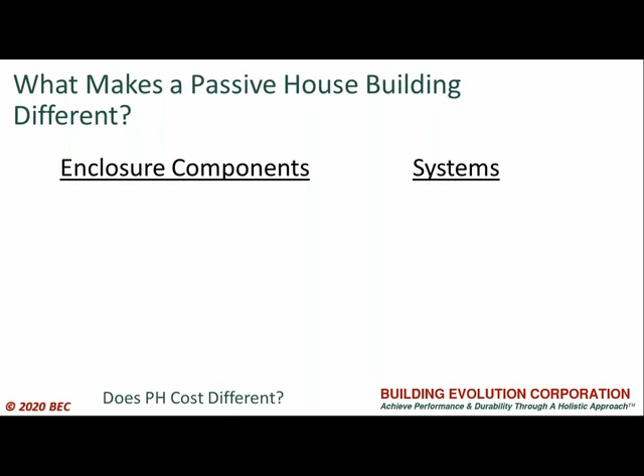You can't answer that without answering the question, how is Passive House different? Different from what? And how long is a piece of string? So it depends a lot on what we are normally building. And we can tell you what's different. So what we'd like to do is go through and talk about what are the big things that are different in a Passive House.

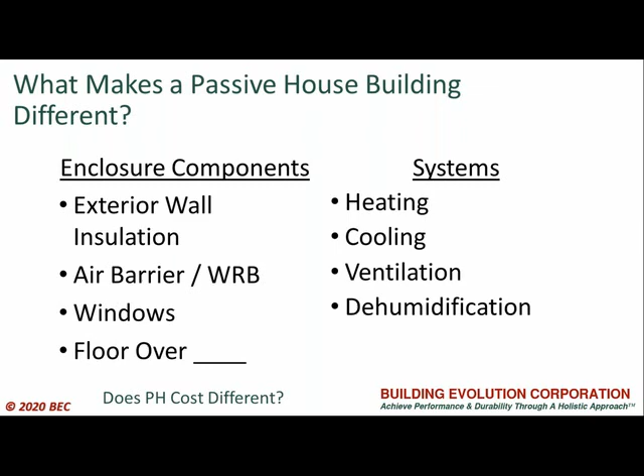I've written them down over there: the exterior wall and the insulation in the exterior wall. That's real different. Air barrier is different. Windows, floor over, whether it's over a garage or an overhang over ambient, that's going to be done different. On the system side, your heating's probably a little different. Your cooling, ventilation, dehumidification. Am I missing anything? Y'all are doing dehumidification, right? Your projects? Okay, good.

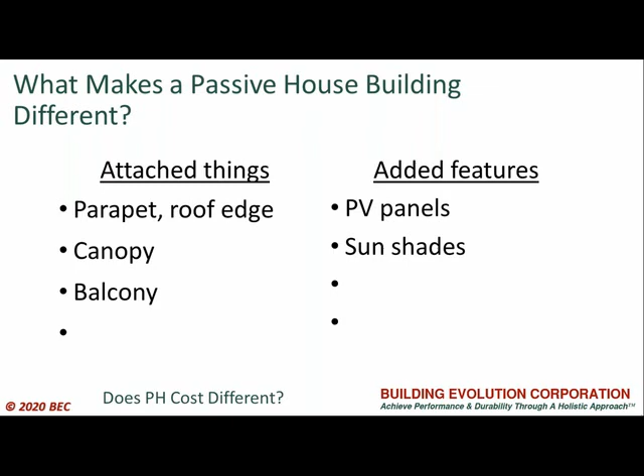All right. Things we attach to buildings, like a parapet, canopy, balconies, added features, PV panels, sunshades. We've got some stories about those if we get time. And then, of course, the design process. Things are going to be a little different. And in the construction process, things are going to be different. So let's go through an example.

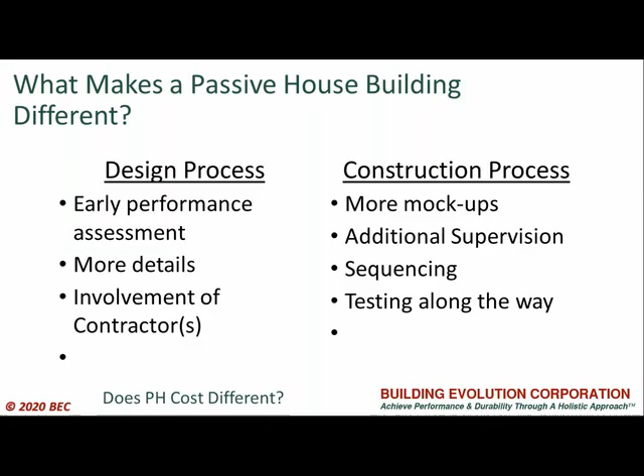We have the exterior wall. So what we normally do, right? We're going to put some kind of vapor retarder on the inside, maybe a smart one, maybe a dumb one. Cavity insulation, sheathing. Sometimes it's taped, sometimes it's not. An air and water barrier on the outside. It may be here, it may be a loose sheet. Exterior insulation, typically between Z-girts. By the way, that's not continuous insulation, but it's exterior. We'll give you that. And cladding.

So, what's different in a passive house? We're going to take an exterior wall. I know there's different ways of doing it. Some people are doing a double wall construction, but if we're putting the insulation to the outside of the sheathing, we no longer need anything more than latex paint on gypsum for a vapor retarder on the inside. So we get rid of that component.

We have cavity insulation, we have sheathing with integral, two different ways of doing it. There's the ZIP wall approach, where we put up the sheathing, it's got the stuff on it already, you tape it. There's the fully adhered air and water barrier, real continuous insulation, so it has to actually be continuous, and cladding.

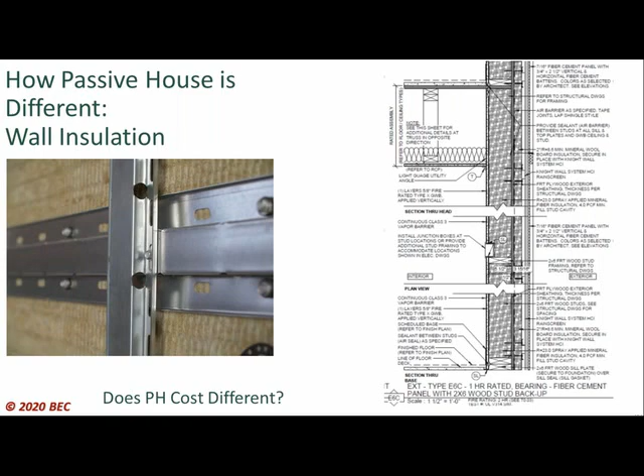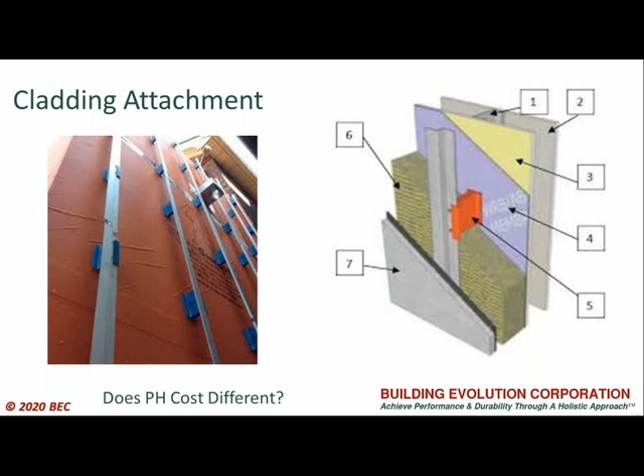So, just an example, over here on the right, we have a typical wall section where we might see some Z-girts going through there, vapor retarder to the inside, and an alternative system giving us continuous insulation, a slight variation on the theme. Here's another system for continuous insulation, and this is shown over an air and water barrier. The picture of it.

Okay, so here's the part of the program where we're going to introduce you to this game of more or less. We've talked about this wall assembly. We'll give you a chance to review it. We're going to ask you, the audience, to tell us whether the passive house building is going to cost more or less than what we normally do. I'm going to need a tally man. Is that you, Wes? I think it's me. Great, Wes is going to take a tally.

And then we are going to submit your answers to Judge Ed from Delbrook, who's going to tell you if you're right or not. And if you get enough answers right, we'll come up with a prize later. Trust me, it'll be worth it.

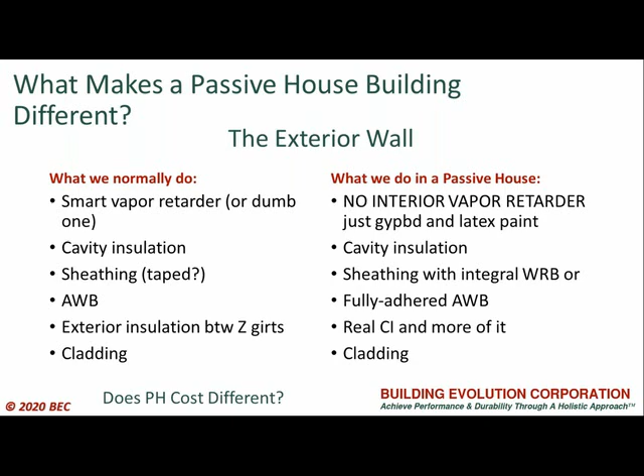Fantastic. All right, so again, here in this example is what we normally do and the passive house wall. So is the exterior wall more or less? How many folks are going to tell us that the passive house wall assembly is going to cost more than what we normally do?

You could say the same, or, the correct answer is always it depends. So we're going to disqualify that answer altogether because that's just too easy. And if you say it depends, you're going to explain to us why it might be more, why it might be less.

So just to Julie's point, we were fortunate enough to win the RFP back in the day and get introduced to pre-construction services. And for us, it was back in the days when LEED was brand new and everybody got super excited.

I'm going to speak today about process, because every job is a little bit different, and your baseline budget could be a little bit different on every job. So talking about what you're going to pull, you know, the 2% difference and the high numbers coming back down to low numbers.

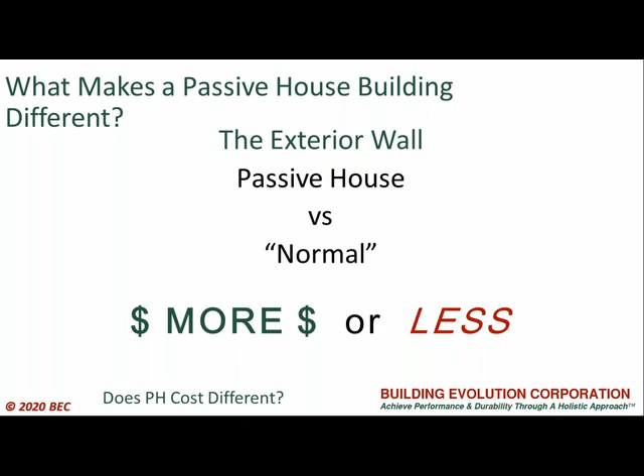Okay, so you guys are good. Off to a good start. All right, moving forward.

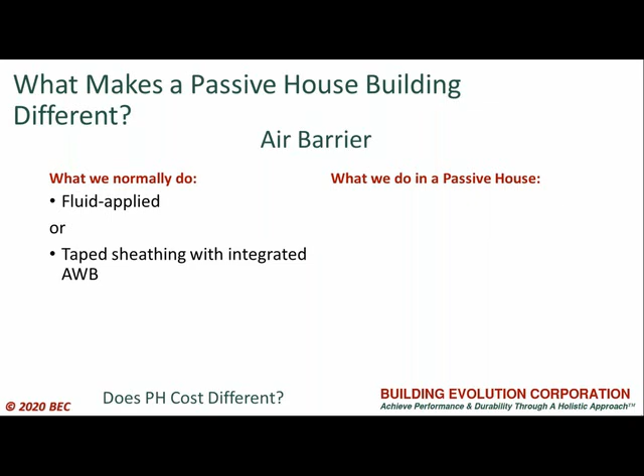Air barriers — something very different about Passive House is the air barrier. So what do we normally do? It seems to be, when we look around, a lot of fluid applied. In the stick frame world, where it's not non-combustible, we see taped sheathing with the integral air and water barrier.

And so in a Passive House, it's kind of the same materials, but we probably see a little bit more of this kind of stuff — you probably hear sheet membrane. Is Oliver here tonight? But we may see some unfamiliar imported products, and the cost of the actual material and the whole system changes.

The whole time — are we still doing this? Really? Okay, all right, it's okay. All right, so maybe there are some things that are different.

Certainly the level of application is hugely different, right? That's the air tightness there — 0.06 CFM at 50 pascals per square foot of enclosure. There will be a test later. You can compare it to the compartmentalization standard of 0.3, so that's a factor of 5, if I get the math right. I'm referring to that number as the PHIUS 2018 standard.

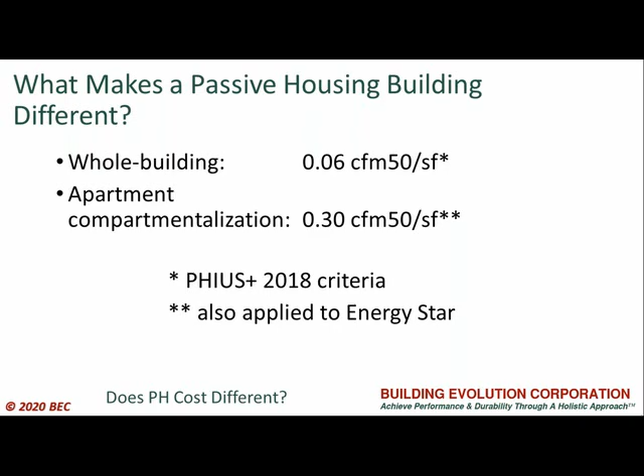And of course the compartmentalization is Energy Star as well, so it's like code, only tighter — a lot tighter. I don't know if folks are using this portion of the code, and maybe the numbers have changed from 2015, but it's kind of been in there — a performance path for air tightness in the code. That's what's in the code, about 0.3. So again, Passive House is about a factor of 5 tighter.

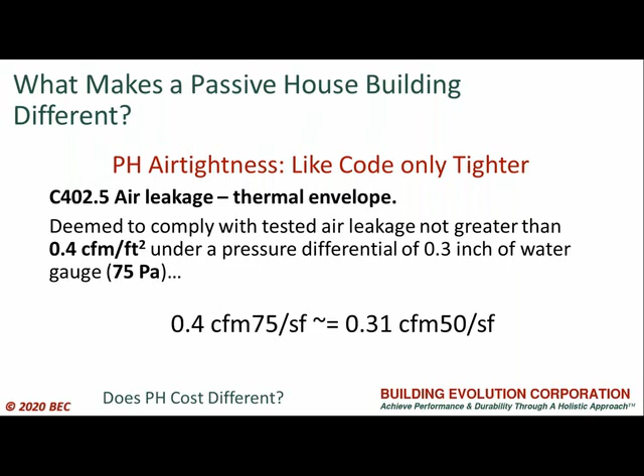Another thing we run into with Passive House is sometimes the air barrier is on the inside — it's not just around the outside of the building. You may have a space inside the building that really should be separated from the rest of the program, like a compactor room would be a good example. So we need to bring an air barrier to the inside of the building and figure out places where we're going to need to turn the air barrier in. Things get out of sequence, because you're doing your exterior application there and then coming back to frame in that wall.

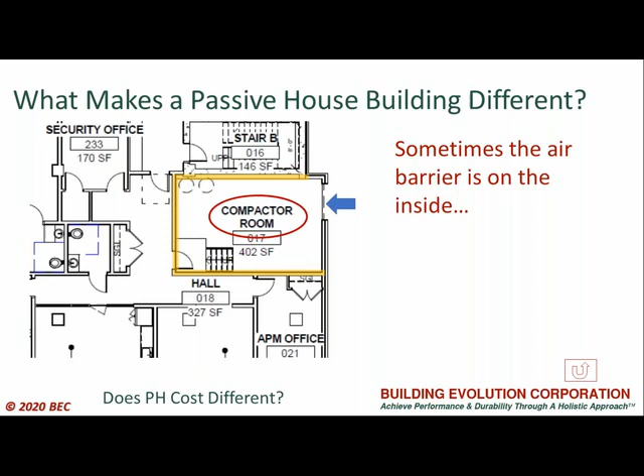Those are things that happen. Okay, ready for a second one? You can keep this going.

This is one of the challenges we're looking forward to learning, and it's kind of not something you can estimate. It's the same material, the same products, and everybody's obviously super focused on waterproofing your facade, so that's not going to change. The cladding's not going to change. This is where it's the interruption of the material that presents challenges in Passive House.

An example would be the detail later about the roof parapet. You need to continuously carry that air vapor barrier and waterproofing barrier, so that has to go on as you do your roof sheathing, and then you're going to put the parapet on top. So not something we normally do.

So it's the kind of indirect cost you're going to have with the resequencing, and that's another thing we're fortunate enough with pre-construction. We've gone to numerous meetings. These guys with TAT have done document review through SD to DD to permitting, so there's meetings weekly, every other week, just going over details. We have my superintendent and my project manager on those calls, working with the architect, working with Ken too.

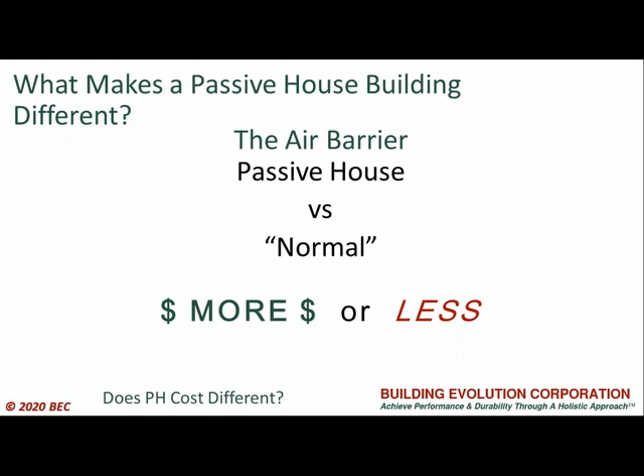All right, good. And Ed mentioned the architect, so I want to give a shout out to Brad Griffin in the back row. Hey, Brad. All right, great work on this project. We'll talk about process a bit later.

Windows. They could afford wood windows on this project. Take this picture on the way over.

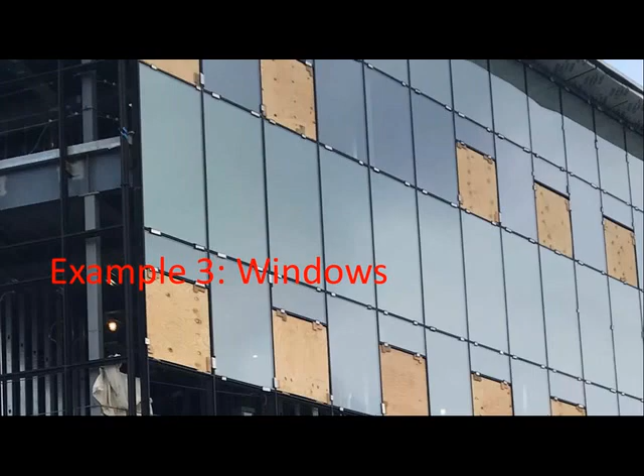All right, what we normally do is something like an Energy Star qualified window. It's probably actually a little better than Energy Star. We have, because usually we're needing to do exterior insulation control, these bucks projecting the window out, trim extensions, a little bit of fussy details around windows. In a Passive House...

Better window. You could spend more on a lesser window performance-wise depending on what criteria you're looking at, but better in terms of the U value, and having not only the glass but also the frame becomes really important. The way the window is installed in a Passive House is typically right in plane with the sheathing, and the air and water barrier makes things a lot simpler. This is what I would tell you to do anyway. Thank you, Passive House, for giving me the leverage.

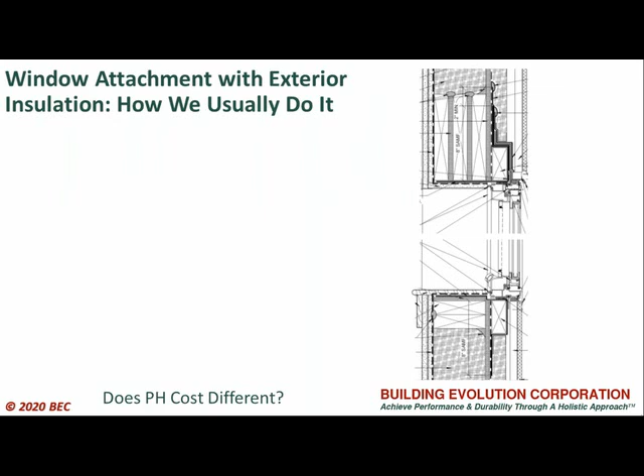And looking at windows with integral trim extensions, let me show you what we're talking about, what I mean. How we typically do it might look something like this, right? Lots of lumber, because we have these bucks, the window is projected out of the bucks, thermal bridge right there.

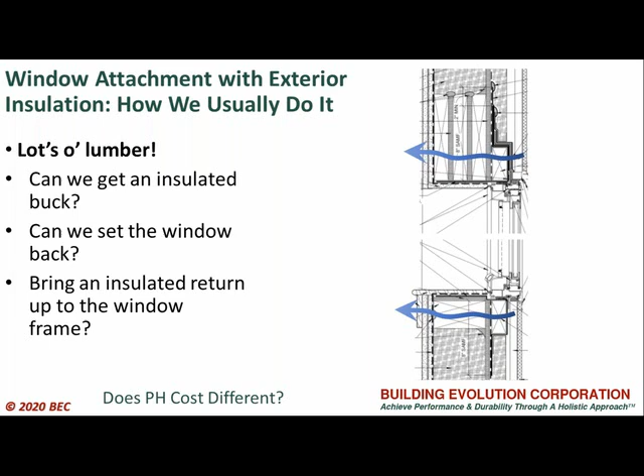So can we do something about that? Can we set the window back to line it up better with the thermal control of the wall? Can we do anything to get insulation near the window frame itself?

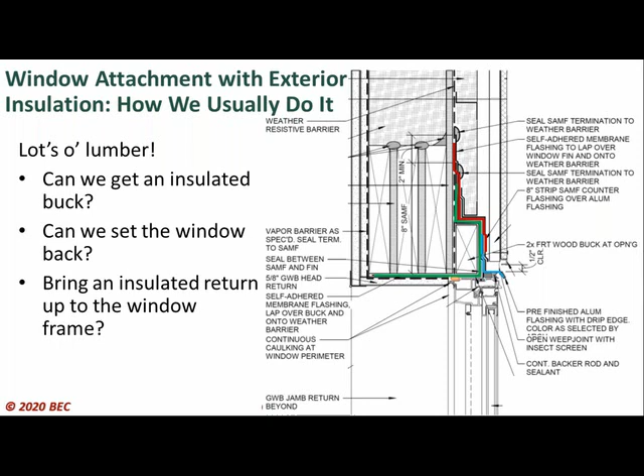In terms of air and water control, you get this fussy detail with the buck. We could draw these things and maybe believe you can bend the membrane at a right angle, but I know this has a bunch of outside corners, and they become a thing of origami. From my experience, fluid applied is not the solution—maybe on a couple windows, but not on several hundred windows on a job. So I find that approach a little bit risky.

So here's a passive house approach. We've got this nice window with a frame extender, an integral trim extender built in. Look where we can put the window—we just nail it on the sheathing, like we always do. Yeah, it's right in there. It's black and white, should have colored it up.

And then it makes the air and water transitions really simple. So I was trying to sell you on this being a simpler approach for risk management, but how does that come across in cost? You still have this window that's probably going to be a fancier window in terms of price. So let me start with the less.

So this item is a little different. If you do it in a vacuum, your windows absolutely cost more—your Alpen window is a superior window, it costs more, absolutely. You have to do the net balance, the adds and the deducts. You got to take the cost of the framing, the simplicity of the waterproofing. The integral detail with the window trim to the cladding material is proving to be very beneficial to our subs and the architect and the waterproofing consultant.

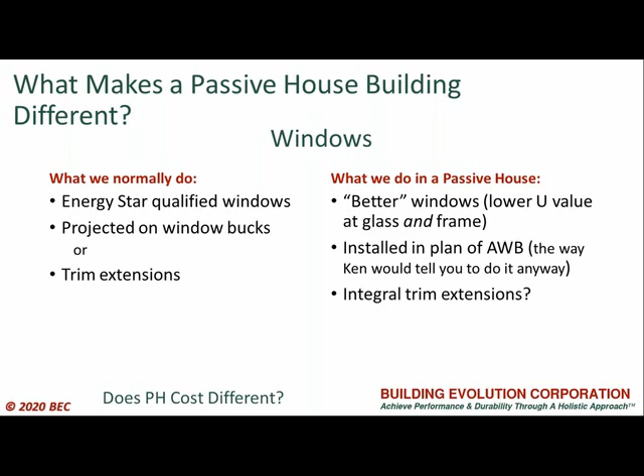So what about the tape and install, with respect to the waterproofing piece? We haven't done a mock-up yet, but right now the framer and the waterproofing guy—I'm concerned with that—they've come to a couple meetings and they're comfortable, actually looking forward to not having those outside corners and dealing with that.

Again, it's going to become a sequencing issue. On most jobs now, you do the window frame first, then you got to put the buck on, then you got to do the water and AWB again. So from a sequencing perspective, this might get our windows in a little bit quicker.

Fins, no fins is also something you got to look at with your waterproofing. It's a really crucial thing—it completely changes the aesthetic of the building as well, because of the way you visualize the windows, because it makes sense now. The returns actually look much more like a residential building. It tells you a bit about how the building is built.

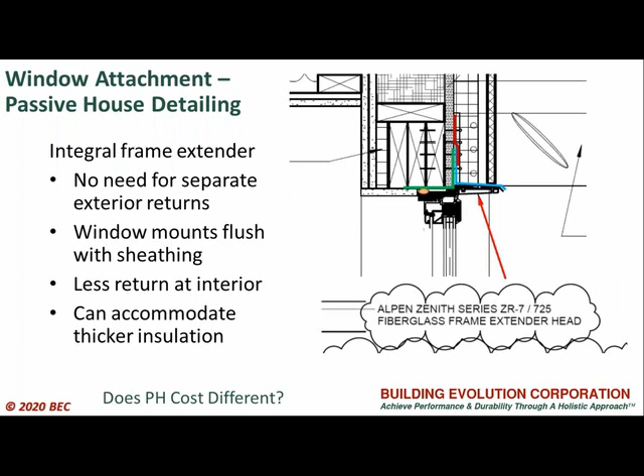So it reveals something. Thank you for that. All right. So we're ready for this. How are we doing so far? You holding up okay? You all right?

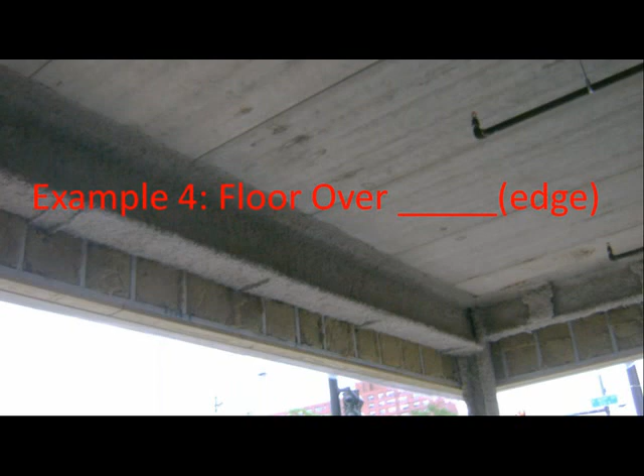All right. I'd like to talk about an overhanging floor and the edge condition, because just about everything that I see coming in is a podium construction. So we're going to be dealing with this sort of edge of a floor that's hanging out over either a garage or ambient space, something unconditioned. Right? So that's going to present a challenge.

So what we normally do is we're going to sort of build some sort of ceiling and enclosure. We're going to stuff some fibrous stuff sitting on top of that, put lots of holes in it. Yeah? I'm just gonna say less. Less. Yeah. All right. So in a passive house, we don't do that. Right.

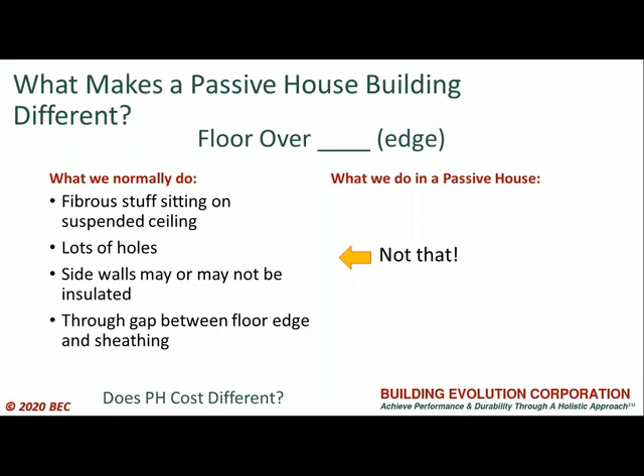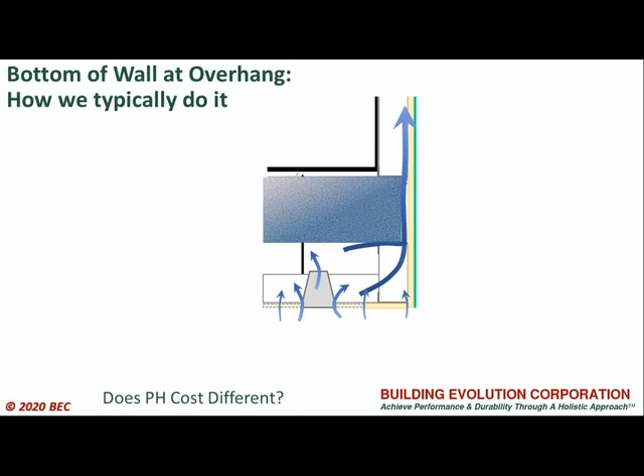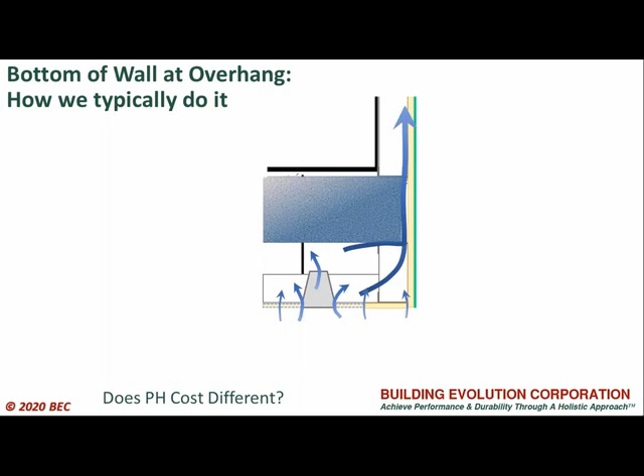Just a little illustration of what I mean by this is what we typically see. The wall passing right by the slab edge coming down. We might have a tile ceiling across the field, lots of leaks in the joints there. We're gonna stick in some lights and other fixtures and get some more leaks. And, you know, we have a gap here. I mean, yeah, it's fire stopped, but it's not really tested, right, to be airtight there typically. And then the floor is cold and we have to pump heat in there to keep people from complaining. So that is kind of what we see as the standard practice, been going on for a while.

Here's another approach.

Sorry if I keep shooting a laser, you guys. I just missed the button. Laser. You guys have safety glasses? Put them on. That'd be great.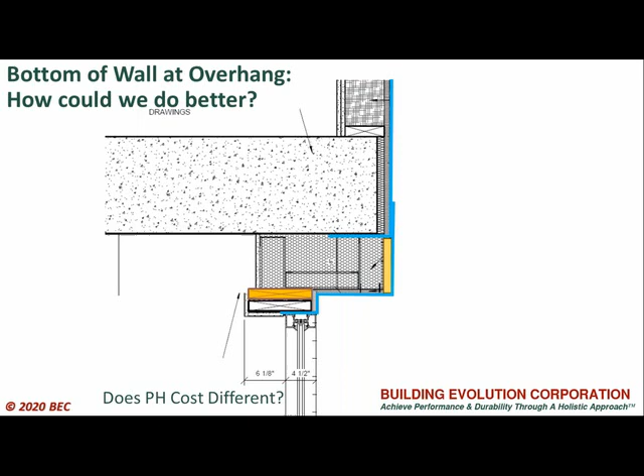That's its hidden slides. I figure we don't have time tonight to talk about the field of the floor, but it's another slide. We can get to that if we have time. All right, so back to this one here.

Okay, how many people are going to tell me that the passive house system costs more? Yeah. 1, 2, 3, 4. I'm sure it does. Really? Okay. Okay, how about less? Yeah. About 10. How many people really don't want to tread on this one? We got more than 14.

So a passive house podium would have like an R-30 in the floor. Okay, so I didn't have the details. Want to bring it up? Can we unhide it? Well, how about we go back to it, John, at the end? Well, what floor are we talking about? Over 80? That's the commercial space. Podium over commercial, first floor. In this case, it happened to have conditions. So it's adiabatic. Right, so it's adiabatic in this case. Similar condition though, but we'd add insulation if it's over it, right? But that's the cost factor, right? Adiabatic doesn't cost anything. Okay.

If it's over a podium, we still have the air control, right? Because in this case, we're separating a non-passive house program from the passive house program. So we've got residential over commercial, so we still want to have air control. And we still want to have air control anyway for compartmentalization and for managing the building pressures. So this just reveals how passive house is kind of good risk management and good practice. So it's making our job easier to wave around the banner of passive house to get some good performance.

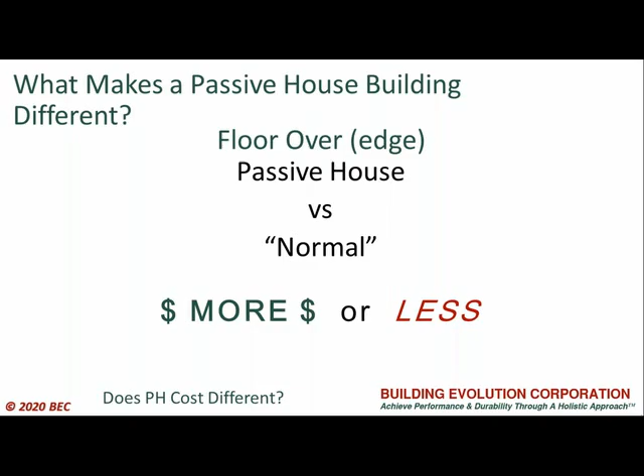So what's your verdict there? I think it's still a little bit of a TBD. TBD. All right. It's TBD. Well, I think you're with most of our TV audience, which was in about the same place. We didn't have many people jumping in. Okay. Let's talk about that parapet.

Okay, so what makes a passive house different? What we normally do, right, because we're trying to brace that parapet, we take advantage of the cantilever of the framing, run straight up past the roof deck. The roof membrane goes up and over. The AWB of the wall runs up to usually the parapet cap. Maybe they come together, maybe not.

So in a passive house, we don't do that. And I'll show you a bit why. In a passive house, we would have the air and water barrier wrapped directly onto the roof deck from the wall, and the parapet gets built on top. And it looks like this. No, actually, it doesn't look like this. This is what we don't do. And I just want to help explain a little bit of what one of my old bosses, Joe Steeper, would call parapetitis.

This is just something that happens, right? Because this is fluffy stuff in steel stud walls, so that's kind of open, and that beam serves to unify everything in one big pressure plane. So we get air going up there, and it will leak out and condense and get icicles coming out from under the cap. You also have issues with condensation because the backside of that thing is real cold. There's no insulation on that side, and you have interior air mixing up and circulating there. So you expect some condensation back there.

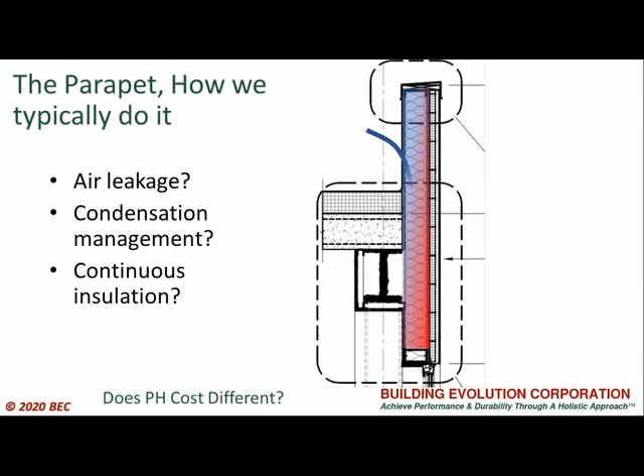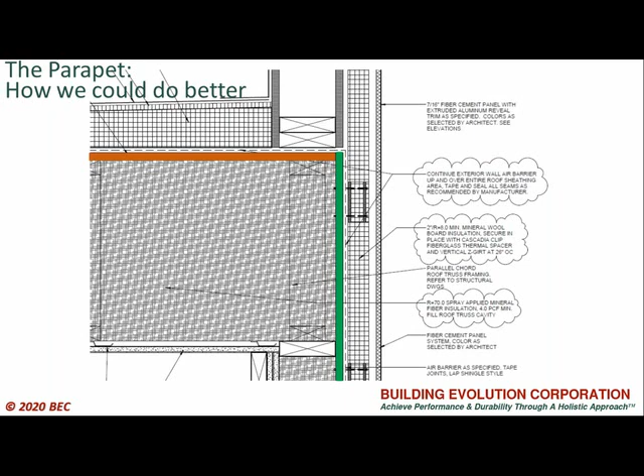And then you also have issues with continuous insulation and a lack thereof. So that is our typical parapet condition. So here's how we want to do things different. We want to be able to put that wall sheathing on, the roof sheathing, make a nice, simple 90-degree corner, and do a continuous thing. Only doing that continuous thing, that's probably pretty far out of sequence, and that's a bit of a stretch.

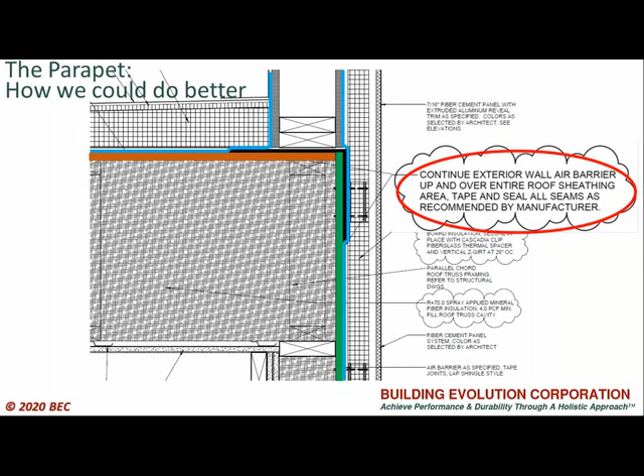What we could do to make life easier is, when the framers are there, put a membrane strip there, make that connection. Framers continue on, frame up the parapet, and then we can run the AWB up the parapet and the air control on the other side. Okay, and we've isolated the parapet, taking care of a major air leakage location.

So, doing okay? All right, you're gonna get back with me now. You kind of dropped off on that last one. Let's start with the mores on this one. Is the passive house approach gonna cost more?

Six, seven, I don't know, it's not many. About eight, nine. Oh, I see ten. All right. Call that, Wes. How about the other side, less? Okay. One, two, three, four, five, six. That's a cop out. It's about 12, 14. All right. Put it up there. There's somebody in the hall with a hand up.

All right. So, what do you think, Ed? It's incrementally more. You need to add the strip, you need to spend the labor. It's definitely not less, but it's going to be a sequencing thing. It could be a lot more if you don't plan and you don't anticipate it, don't know the detail, but it's definitely a little incrementally more. Incremental. All right.

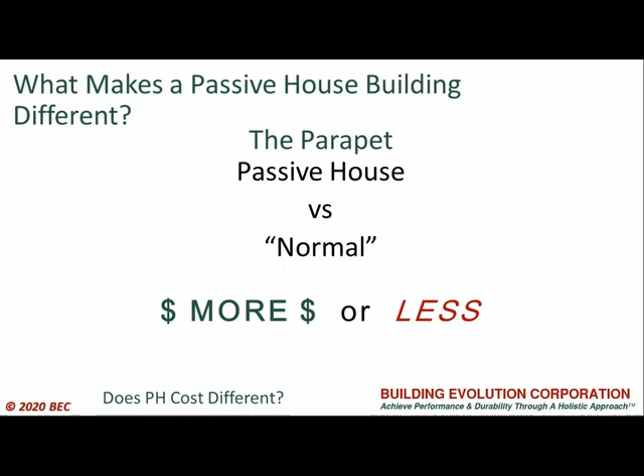What do you think, Wes? Do we have time for one more of the enclosure? We're going to switch over. What time we got now? 7:15. Time we finishing? 10 or 11? All right. I think I want to hand it over to you on the mechanical side, and if we have time, we'll come back. What do we have left? It's just canopy, right? Canopy. All right. Wait a minute.

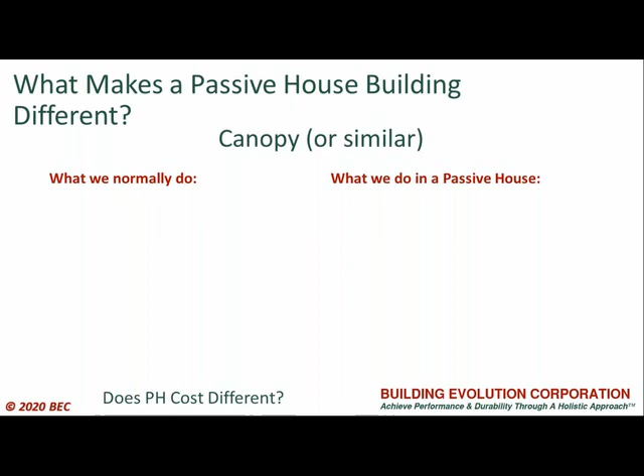All right. Canopy. Normally, we got to support these, right? Because they have to stay up. Rule number one. Thank you, Wes. Building has to stand up. That's right. Okay, so what we normally do is we're going to have a piece of steel. It's going to run right through the sheathing. We're going to try to make it airtight by stuffing some stuff around there and put a bunch of caulk in the web space and try to cover that up.

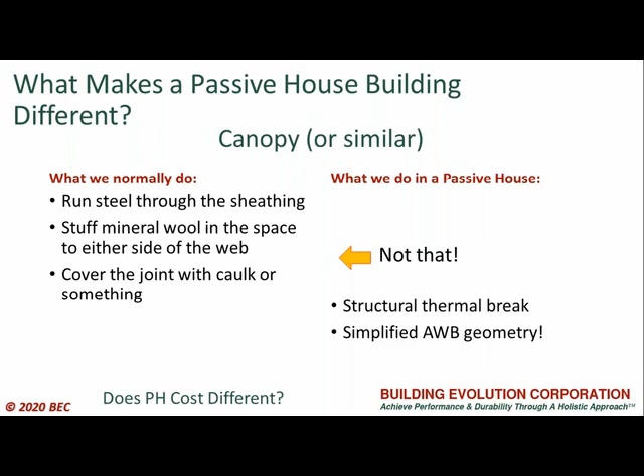Make it real. And then passive house, well, not that. We do something different. Structural thermal break maybe. And we might look for ways to simplify the air and water barrier. Okay, so for example, thank you, Brad. It's beautiful.

But also, just a little segue here. Some little credit to TAT because they approached us with their structural engineer. We want to do it this way. And Brad says, well, we should run it by Building Evolution to see what they say. And I said, I think you better tell your engineer to do it again. And of course, Brad being the architect, he's very diplomatic, so he put those words in more gentle terms. And the engineer came back with a thermal break here.

So great, we have a thermal break, and sure, it's not insulation, but man, is that better than steel? It does a lot less. But what I really like about it, the science geek in me says, I can flash this piece a lot easier. Flashing to a square thing, we know how to do that. I'm pretty sure that can be done in the field. So that's one thing that's going to be different for these little attachments, little roofs and canopies sticking out. You know, we're not going to have steel sticking to the field.

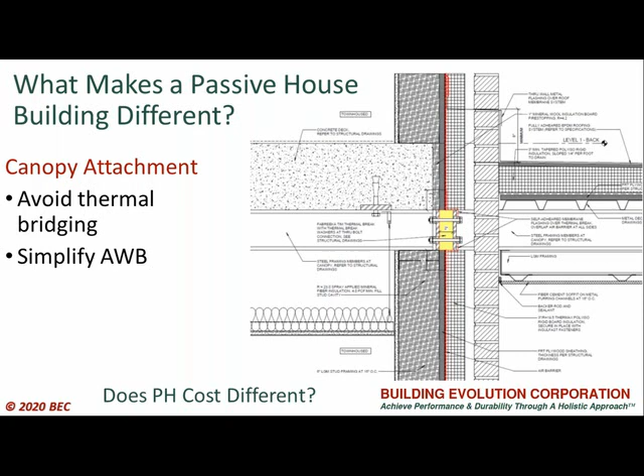All right. Let's get another picture from their website. So, what do we say? Is this going to be more? Who says more? All right. Line them up. What do you got, Wes? About 15, 18. Who says less? How can that cost less? You gonna say less? Engineering is going to eliminate. All right. Oh, we got a couple less in there. About 5. All right. Okay.

It is more, but it's 1 or 2 on a job. I think it's the Armatherm blocks we're going to be using. So it's a structural block that, again, education for us. We have a new manufacturer that makes blocks that can, again, thermal bridging is the key. The continuity of the barrier is key. That doesn't get accomplished with steel and wood ledgers. So it's definitely more, but again, in the grand scheme of things on a $45 to $50 million job, a couple canopies and a couple Armatherm boxes.

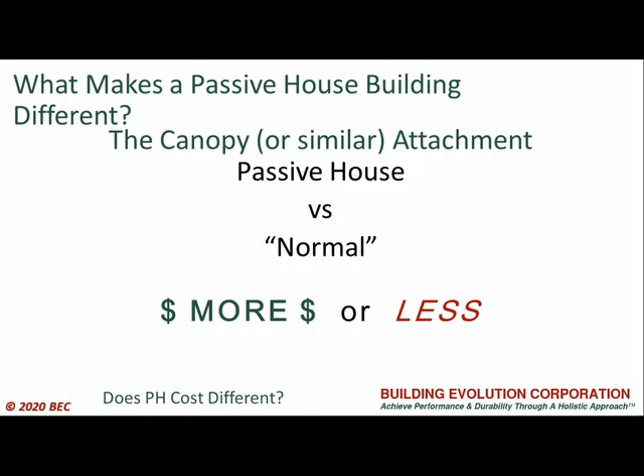Okay. Oh, dear God. You know I'm good at breaking things. You like your ribs. Oh, yeah, I just broke 6 ribs 2 months ago. It was good fun doing it though. Would you do it again? Yeah, I've got a 4-wheeler since. All right.

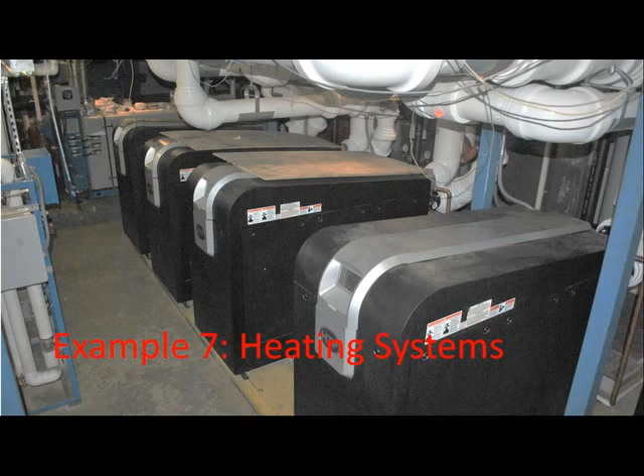So here we are getting some heating systems, and we're going to look at traditional versus what we might do for some passive buildings. So what would you do here? In traditional, the boilers have a hydronic system to connect the entire building, controls, fan coil units, or baseboard radiators, or you might do one-to-one heat pumps or VRF. The best options that are common for new buildings today. What would be different for a passive house? Probably wouldn't be boilers. You keep it to the VRF or one-to-one heat pumps. They're both fairly common types of technology that are widespread and used in many different types of building.

So, what can be improved on a situation like this? If we're going to go one-to-one systems, what can be improved? Solar panels. So, okay, solar panels. So, how about not doing one-to-ones? I mean, look at that roof. You can't really do much with it. You can't have a ping pong or anything like that on that roof afterwards. You can't do solar panels unless you do a canopy up over it.

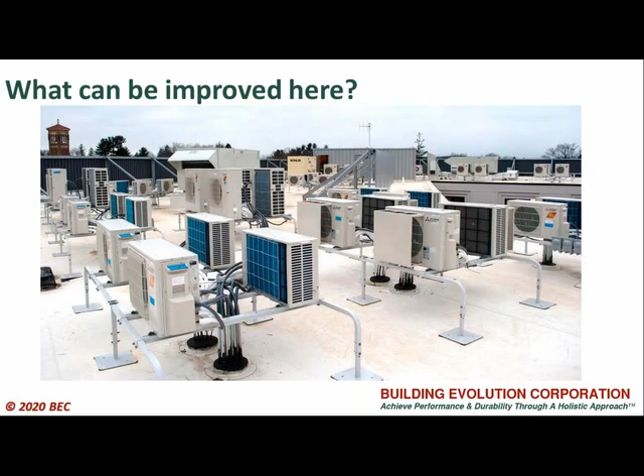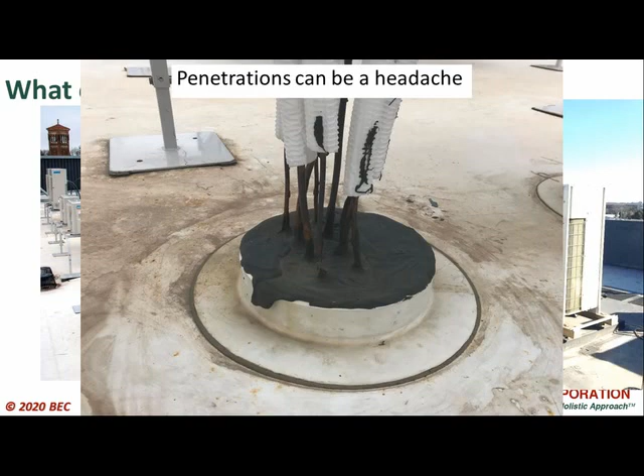The other thing is, if you were to go VRF for that building, you're looking at a central system located somewhere on that roof, nice and tiny, freeing up the rest of the roof space. And think of what the roofer has to go through to try to seal up all those penetrations. You have 50 or 100 or 150 penetrations trying to get down to the actual building. And then you have all of these home run distribution systems going from rooftop 5 to 6 stories down below to make the system work for each unit. This is a headache for a roofer.

So if we were to go from passive house versus normal, what would you think would cost more? If you were to go from a typical building versus a passive house approach to say a VRF type system. And what's the typical building? What are we putting in typical? Is that boiler system? Yeah, because the loads are smaller. So that's why we did the enclosure first, because the enclosure system has brought down the loads.

Yes, now if we bring down the loads a lot more, then the systems are smaller, less equipment, and especially if you go from one-to-one heat pumps onto VRF, your distribution systems actually separate themselves. So if you were to go from, let's say, a standard boiler system or one-to-one to a VRF system for a passive house, what costs more? Anybody say more?

Less? A lot of less. All right. All right, Ed?

So it is less on Polo Mattapan, with a little bit of a disclaimer. We need to get more subcontractors in the market. We need to get more manufacturers comfortable with this process, with the multi; this region hasn't done it for a long time. You don't have a lot of buildings that have tested this over time. There still come winter issues with snow and stuff like that.

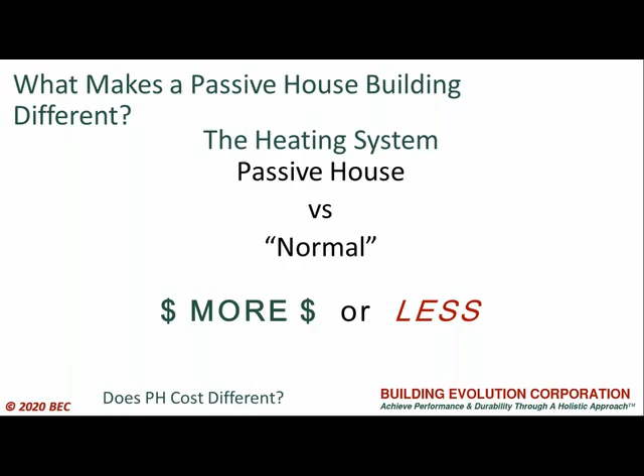The thing for us is that we always want to, we're not required, but before the law, it doesn't require it. Nobody's required to do it, but we need to. So if it's a new building, and we want to put in boilers or hydronic, then we're either adding two extra pipes in the chiller, or we're trying to use two pipe systems and convert it. The cost of running those pipes, and even maintaining those pipes and condensation - we've priced that several times, even on rehab, and it just keeps coming back to the maintenance and installation of that system being more expensive. So we keep leaning on the VRF.

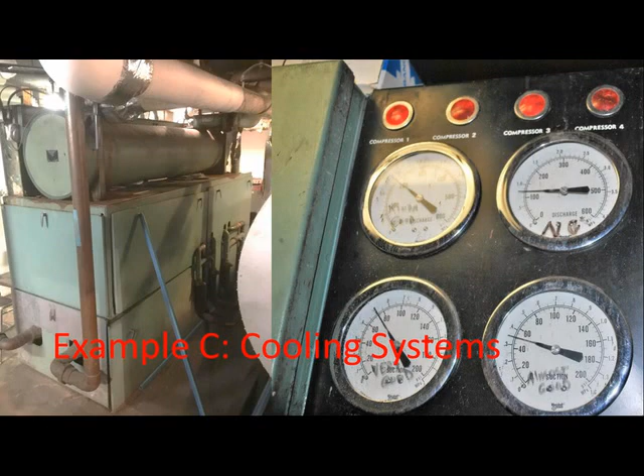Not a whole project. It is not a whole project. No, it is not a whole project. Nope.

But what's the difference between the passive house and normal? We don't do any cooling inside a normal building, or maybe you just do a window AC, which isn't necessarily a really good solution. You have your chillers and fan coil units, doing a 2-pipe or 4-pipe system providing chilled water to the building, or a 1-to-1 heat pump or VRF. What do you do in a passive house? It's already paid for by the heating, so your cooling system is already paid for. There's no added cost - it's less.

Wow. Who said more? Anybody? Can we just take a gimme on this one? Okay, what do you think, Anthony? Yes, that is accurate. All right, so the heating was less, and the cooling was definitely less.

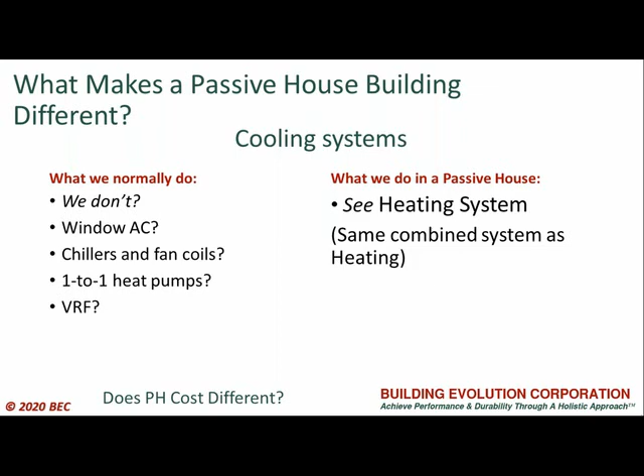Don't need to go through this. Now we're back in the numbering because everybody's paying attention. Ventilation systems.

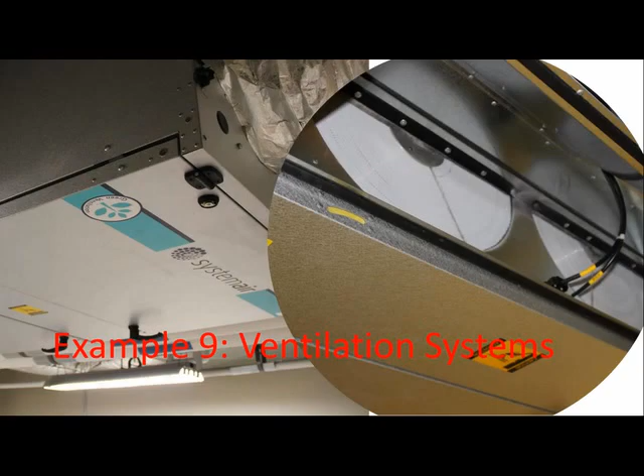What do we do normally? Well, we might exhaust from the bathrooms, maybe supply the corridors, maybe rooftop ERVs with ducted runs throughout these halls. What do we do different? We put in ERVs for supply directly to the actual bedrooms. The questions are: is it centralized, individual, or semi-centralized? These are all design considerations in the design phases of the project.

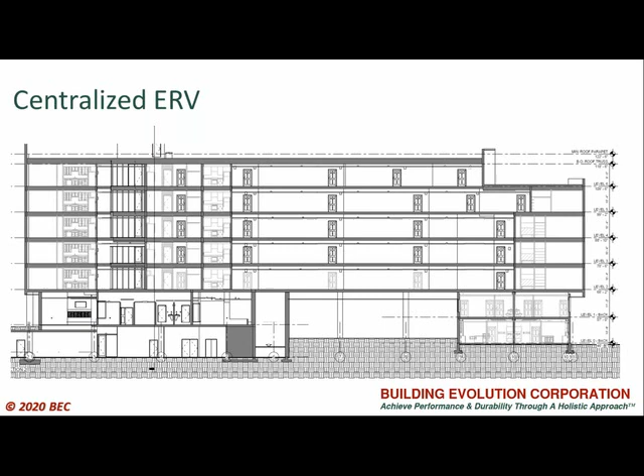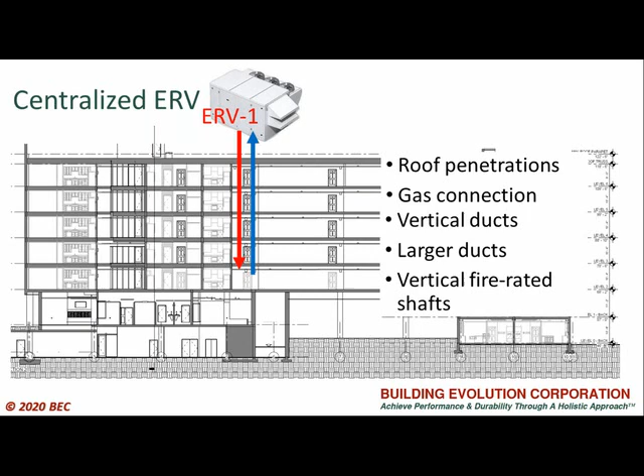So to take you through this, as part of what we did working with Peterson and Mattapan - what do we do with a building like this? If you look at the centralized system, you've got an ERV - where do we usually put it? On the roof, there's a lot of space up there, unlike with one-to-one pumps taking up space. But now you need to run a lot of large gas supply up to the roof, with large ducts coming down from the rooftop into the building. They all need to be fire rated and spaced within the building to connect it, which takes up programming space.

And when you try to balance the system, how many buildings get balanced properly? After they're built, the balance is fine before, but then we don't do this once - we do it 2, maybe 3, maybe 4 times over again on the building. And then it's kind of work, right?

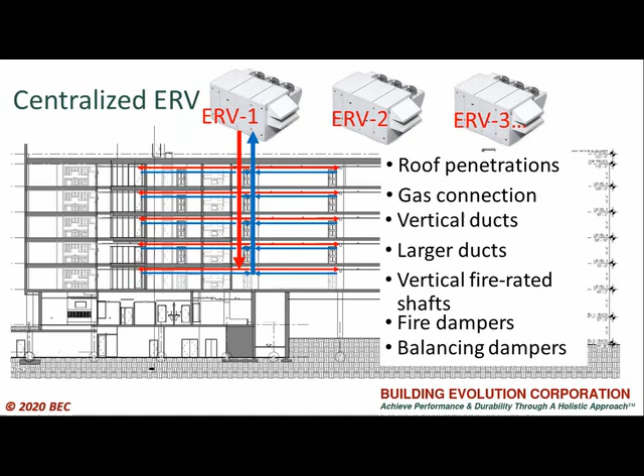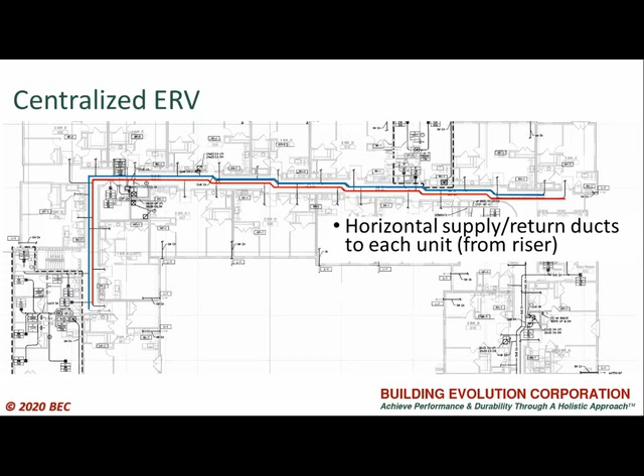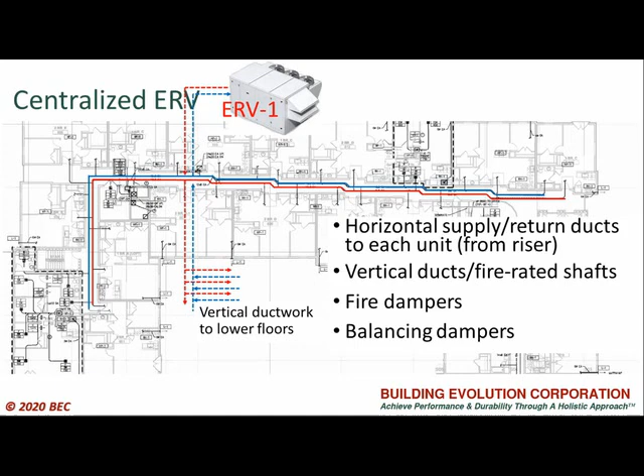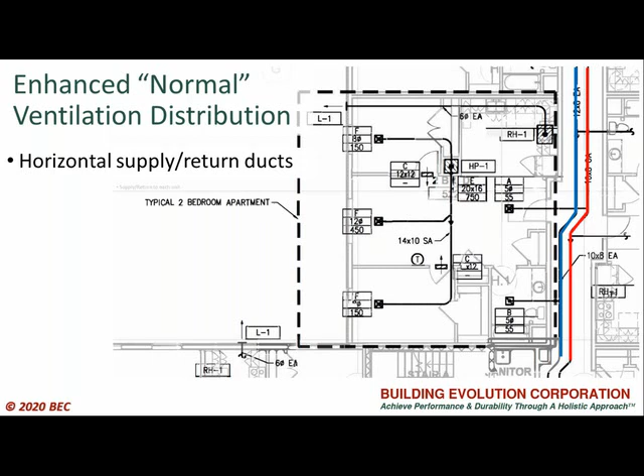So then for horizontal supply and return, you can do balanced supply - exhausting from somewhere in the unit, typically the bathroom, and supplying to a living space. Are we doing this typically? I'd think of this as fairly advanced, but do we have people directly supplying the apartments? That's cool, good. And then exhausting the kitchen ranges out of the building. Depending on where we're located, we might directly ventilate the supply air to all the bedrooms.

How many projects are doing this, whether it's passive house or not? Depending on who's interpreting it, and where the building's located too. We've seen it interpreted different ways, so just checking.

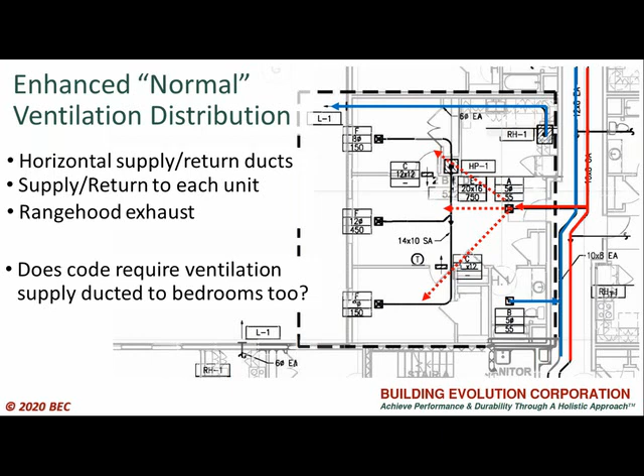So that's code, and if you're interpreting it that way, it's pretty straightforward, right?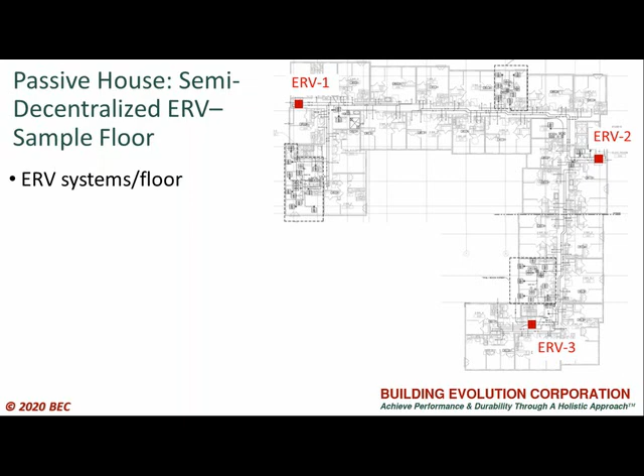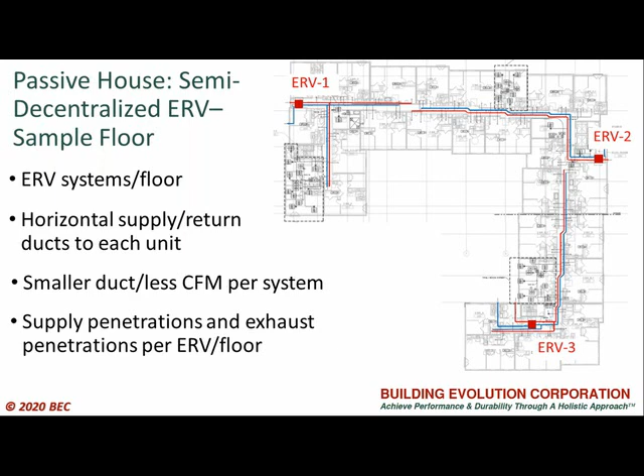What if we just did smaller ducting? They're supplying and exhausting smaller stuff. So simpler supply and exhaust, less penetration through the building on each floor.

Exactly, they work very well. That's one of the options, but for this project it's a Mitsubishi unit.

You said smaller ductwork - is that small enough to be integrated into flooring or ceiling as part of the building's office? They're up in the truss spaces. The key with the smaller ducts is penetration of the corridor wall - it becomes a fire rating issue. Small ducts are much easier to manage when you penetrate those walls. The unit itself is plenum mounted, above the ceiling.

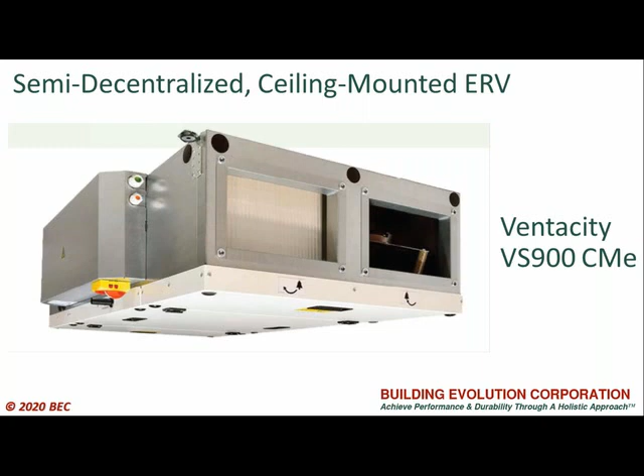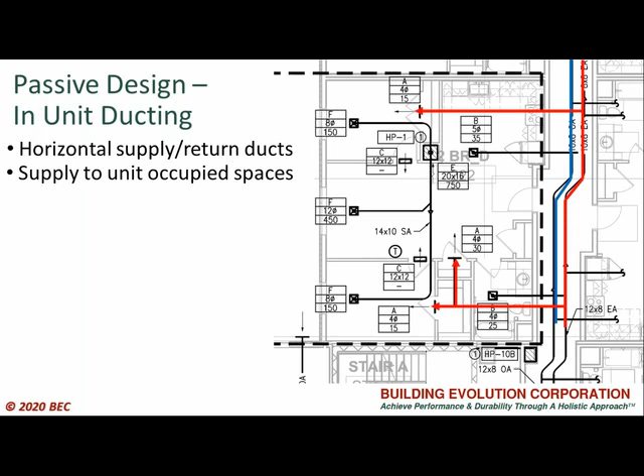And then the passive house in-unit ducting - it sounds like the same thing. It's pretty similar. When you're supplying to the bedrooms and living space, you're exhausting out. The kitchen is now tied into it, but it's a general area exhaust with a filter versus going out to the wall with penetration to the wall or a vertical shaft for kitchen exhaust. So that's probably the difference we end up with.

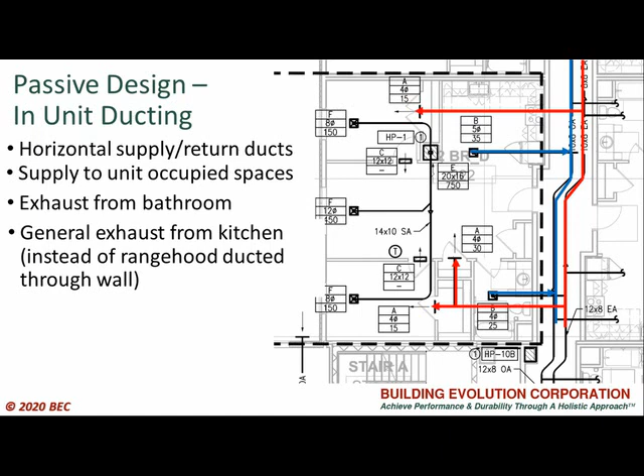So just a recap here - we went decentralized, and what do we think, is it more? Yeah, a little bit probably.

Those are all passive house certified air handlers too, right? In this case, this is a PHIUS project, so it doesn't require it to be a certified piece of equipment. But they are high efficiency equipment. So they're a little more sophisticated, yes, absolutely.

What do you say, Ed? Early on, it was definitely more - again, education, subs were not familiar with the units. We had a bit of a spec issue that we corrected. Ultimately with the horizontal stuff, that's why I referenced it at Mattapan - it was a savings, we had 3 bids that were lower. But the net savings - you've got to account for the fire dampers, the floor holes, so it's a lot of other things other than just taking an HVAC number.

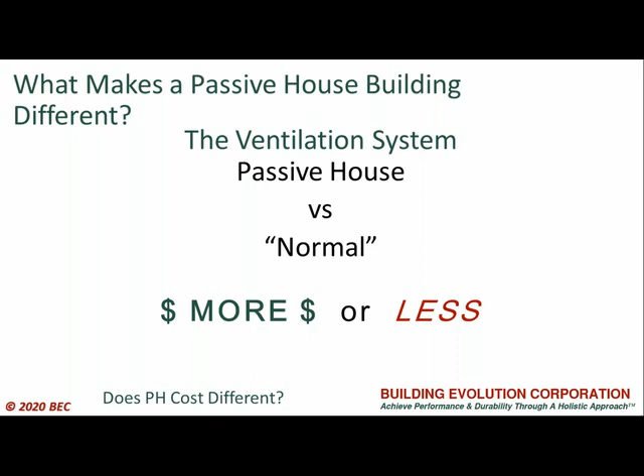Dehumidification. This has been a topic that we're not getting enough time for here. I know. This is a topic by itself. So maybe another day. It's really cool.

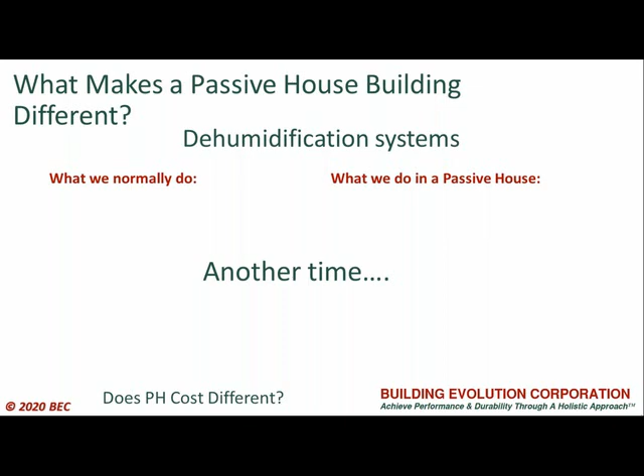The GC is on board, he's pricing that, reaching out to subs, what is thinking about this, and it's sort of like integrated design without calling it that. So if that's what everyone's experience is, integrated design, then that's exactly what everyone should be doing. But if not, this is how it should roll.

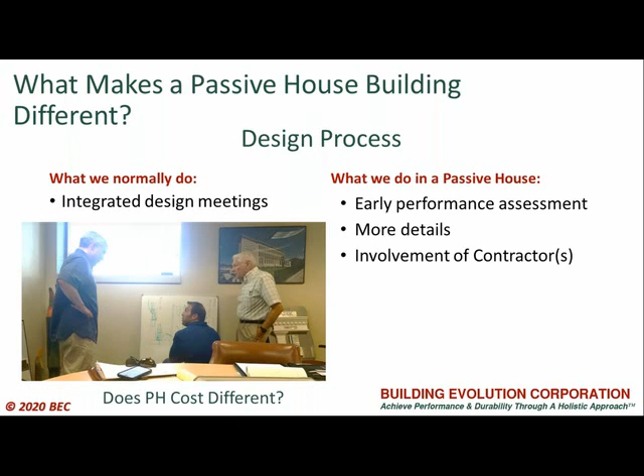Okay, so, I'd be afraid to contradict Julie there. But anybody else want to weigh in on whether the design process under a passive house scenario is going to be, we need to budget more for this, or is it going to be the same, not the same, less? More or less. I think we need to budget more, but the premise is to remove extra costs. So it's just moving the money.

It's like commissioning, right? So, I mean, look at the things that, like, if we just told Delbert we were doing passive house, and they were kind of going at this in the dark, like, what does that mean now? And so we have to demystify this. Maybe in 5-10 years there won't be so much demystification that we have to do, but they deserve it, and our architects deserve to know what our goals are and how to achieve it.

And so I think we're never going to move the market on this unless we really spend the time to pay attention during design, have everybody at the table, pay attention during construction, offer any support anybody needs, try different products, until we get it, and it seems like, oh, okay, well, this is what we did, but maybe a little different. It's a lot different, but it's still the same. It's the same trade, it's the same scope of work. It's a little bit more careful.

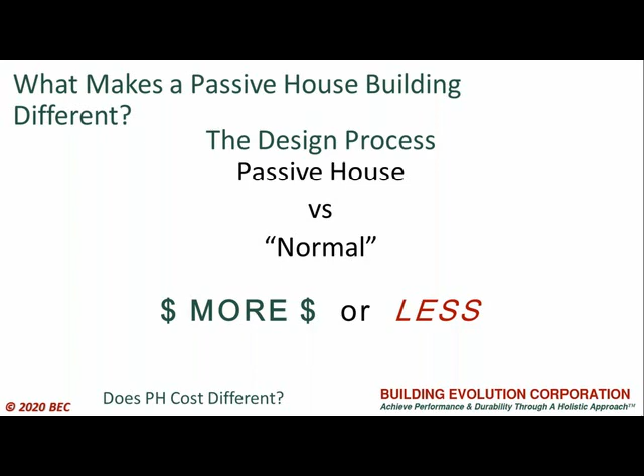Where we at? I think, yeah, we're gonna let you talk about the construction process and wrap up. We'll hit on it briefly, construction process. There's lots of stuff, right? We're doing mock-ups, we're doing additional supervision. You mentioned maybe the other day, you're gonna have extra personnel on site specifically for passive house jobs.

Yes. You get sequencing issues, where you got trades that are gonna be going up in a lift, and then they have to go away, have lunch, come back later. So it's just really what Julie talked about. Our most successful jobs are kind of the same pre-construction process, whether it's passive house or not. But we're fortunate enough, my superintendent who's gonna be building the building, my project manager, my executive who's gonna be running the pre-construction and buying out the subcontractors has been at all these meetings.

And having a superintendent give his feedback to TAT, to these guys, to Peterson, for us is gonna be predictable now. We feel a lot more comfortable that when we go out and build this, there's going to absolutely be this aggravation. If you look at it negatively, you can be, oh my God, we have to do this, this, and this. But Ken did a great job of scaring us in the very beginning about all this stuff, but again, we've been getting more and more educated. So if we didn't go through that design process with TAT and the consultants and on those calls, it's absolutely more money for us, but it's going to pay off in the end.

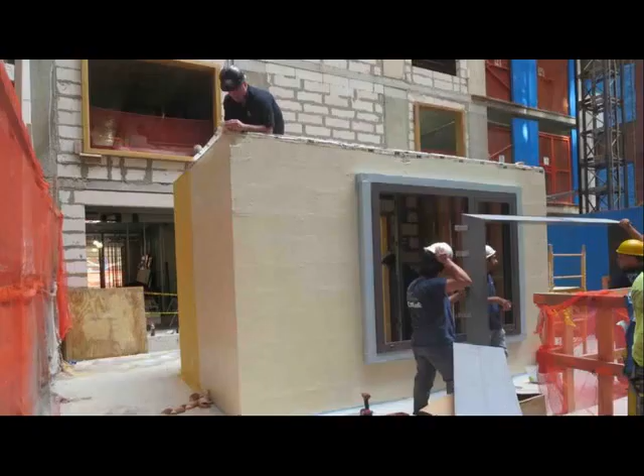And for us, I mean, it's more of an investment cost. Like I mentioned before, we're very fortunate to be living this large multi-family job. We're going to learn a lot, and cost up front is going to pay off for us. We're going to be ahead of the curve. We feel like we're ahead of the curve as a construction manager, and we thank Kohler all the time for that opportunity and the education we're getting.

We're doing internal training. We're going to get all our people. We have 3 estimators here tonight. We're all in. That's where this business is going. So we're very fortunate for this. We're going to obviously build one and tweak our opinion of certain things and deal with it.

And again, for us, it's predictability. If you're ahead of the curve, whether you're ordering materials or planning, you have to be ahead of the curve with this testing stuff. And I think a lot of it's a lot of noise, and it will become part of normal processes. The subs will get comfortable, we'll get comfortable, and I think over time it's going to be different.

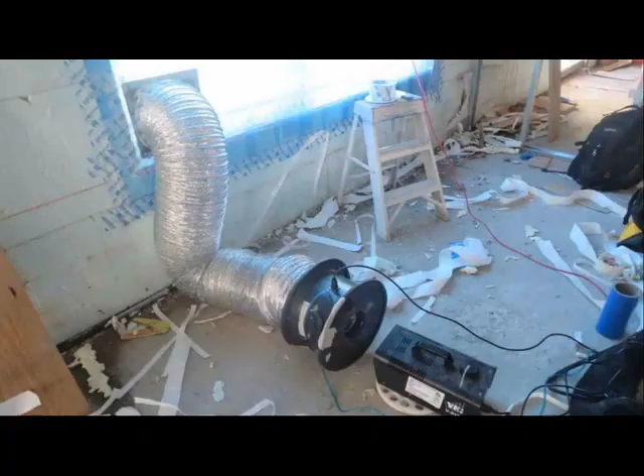Okay. Functional mock-up, not just for aesthetics, we're gonna build a box and test it, make sure the details work. Testing systems along the way, air barriers and such, windows, trash chutes, various things that present problems. Take advantage of the verifiers out there. They have the gear, they have the fog machines. Test along the way.

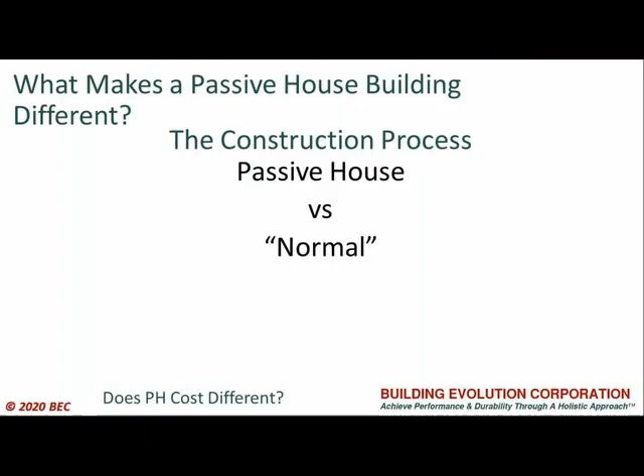Ed, I wanted to turn it over to you if you had any lessons learned or perspectives you wanted to share. You kind of summarized it all as we went. For us, you just gotta acknowledge the teamwork, be comfortable with it. For us, it's going to be a market share where we know we're going to be ahead of the curve, whether it's TAT, whether it's Kohler, whether it's Ken and Wes. Just get involved, be open-minded, don't be closed-minded. And for us, we think we're ready to go. We're gonna start in the spring, and we look forward to it.